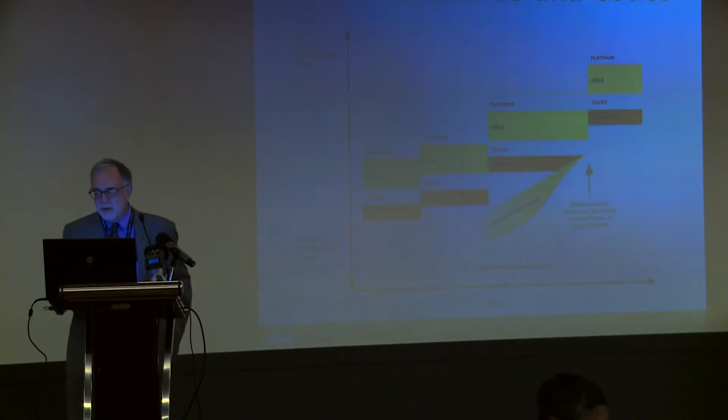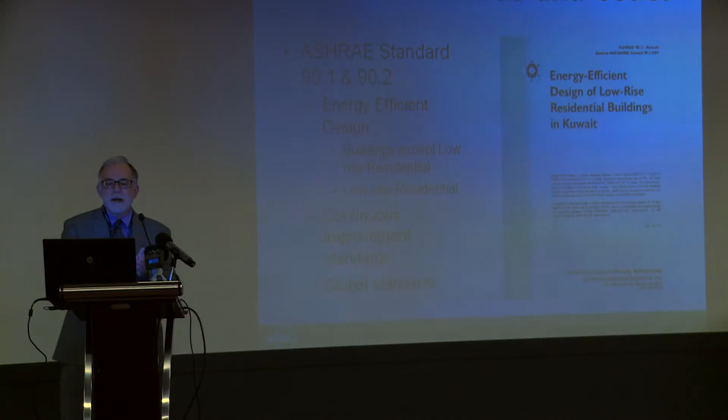ASHRAE is doing the exact same thing. I'm sure most people in this room are familiar with our standards on building efficiency and indoor air quality. This is 90.1, energy efficiency design of commercial buildings.

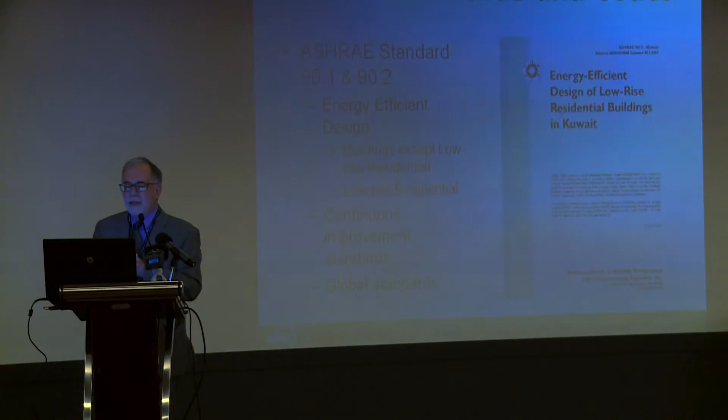90.2, and I'm very, very proud of this. We have a 90.2 for Kuwait that we did here recently. And these are our energy efficiency standards that we use for both commercial and residential construction. They are continuous improvement standards.

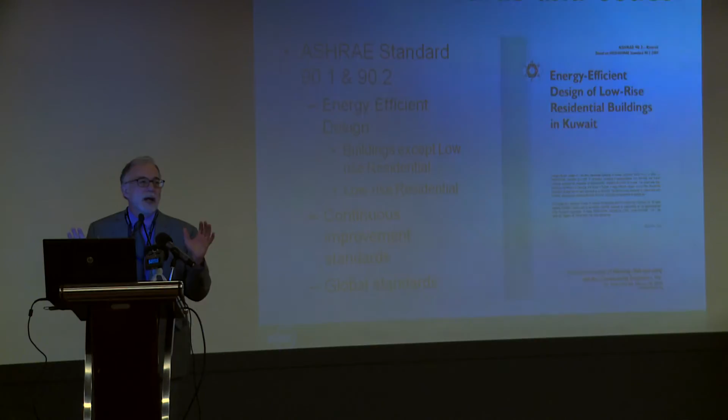That is, say 90.1 comes out every third year. We are getting ready to republish that document at the end of this year. Hopefully it'll be out around October or November. And in there you will find that we are pushing that envelope out. We are raising that bar just like LEED is doing.

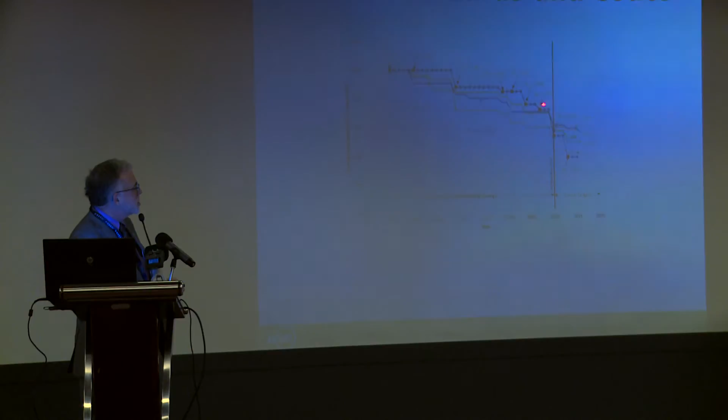So you can find this graph on the ASHRAE website, and this is really the evolution of the 90.1 document. Over time, you can see how we started out here in 97 and how we have a continuous dropping of the energy use in a building based on 90.1.

And I can tell you right now, the 2016 version, as I mentioned, is imminent. It's going to be out at the end of this year. It is going to be the same thing. We're going to continue to drive those values lower and lower to help our industry get to a net zero impact. And so these are a couple of the main pushes that we see within the industry.

Exactly the same story. Energy use on this planet is going to increase. Carbon on this planet will increase. And it is going to increase most dramatically in the non-developed economies, because that's where the population growth is going to be. So it doesn't make any difference whether you look at his data from a carbon standpoint or my data from an energy standpoint. We're telling the same story.

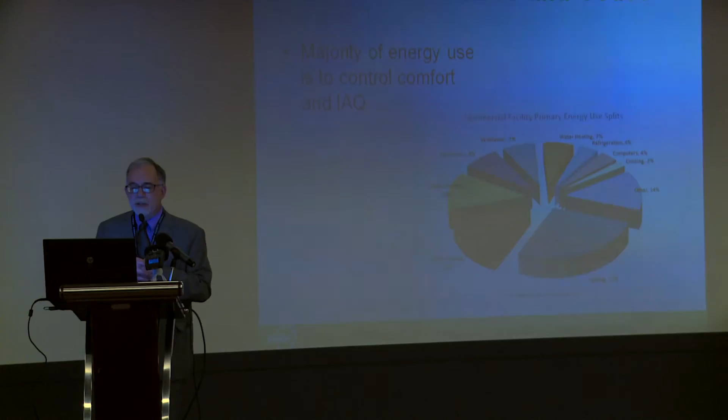I chose this graph because this is from where I live. I was born and raised in Nebraska in the United States, a very rural agricultural state. And as you can see, it's a somewhat cold state because we have quite a bit of heating there. The same data, if you went to Europe, you see that there's a little shift. This is actually from southern Europe. So you see a shift, more space cooling, much less space heating.

And then finally, if you were to look at the data from Kuwait, you would find approximately 65% of the energy use in buildings in Kuwait is used for air conditioning. Okay, so most of the energy use in a building is driven towards comfort and IAQ. So when you start talking about a smart building, when you start talking about HVAC strategies, the first thing we have to keep in mind is those topics are all tied together. And so we're going to have to figure out how to address them together.

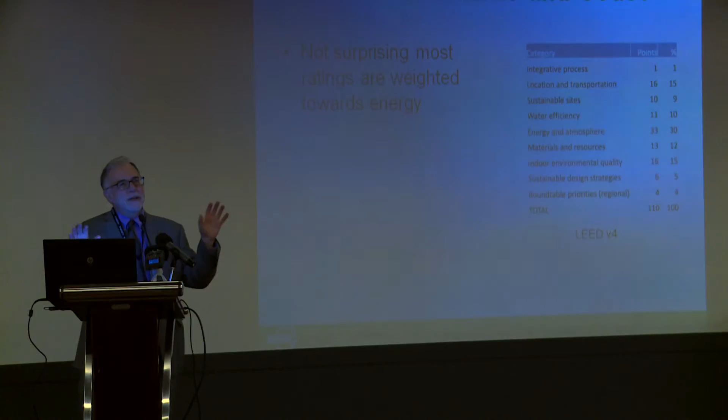How do we get all of those to flow together to create an integrated type of approach? So it's not terribly surprising then as we look at some of the standards and codes that I've mentioned. They are weighted towards energy use. Certainly LEED version 4 is a good example of that. And that kind of drives the equation and causes us then sometimes to forget what a smart building is really going to do in terms of indoor air quality and human comfort.

I also mentioned that I think all of us are going to see a consolidation of codes in our future, which I think is good news. It's going to make it easier for the designers in the room to design. I'm a contractor. Okay, so I came out of the contracting industry. It's going to be a lot easier for us to build buildings.

Here's a great example that is going on with ASHRAE. ASHRAE has signed a contract with the International Green Construction Code, and we are going to consolidate our standard 189.1 on design of high performance green buildings into the International Green Construction Code. So there'll be one document. Instead of one referencing the other, it'll be integrated and it'll be whole. That, we think, will be available to you in 2018.

That's our goal. But I think that is exactly the kind of thing that you're going to be seeing more and more of in the future. And as I said before, I think that's going to be a really good thing for us. So here's some of the issues that we've got going on with standards and codes. Number one, we're running out of physics.

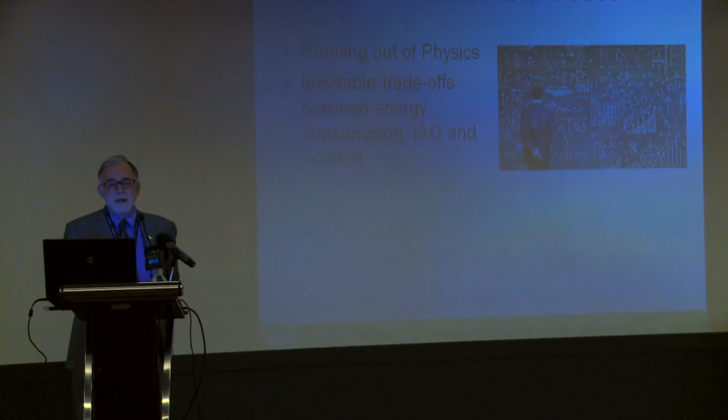Okay? We're trying to move this planet to a more sustainable position, and we're trying to do so with building efficiency. But ladies and gentlemen, there's only so much insulation you can put in the roof, and then it doesn't return. There is only so much insulation you can put in the walls. There is only so much improvement you can do in glazing before you run out of physics. So we're going to have to do something else if we're really going to get to this point of net zero buildings. There's an inevitable trade-off between energy efficiency, energy consumption, IAQ, and thermal comfort.

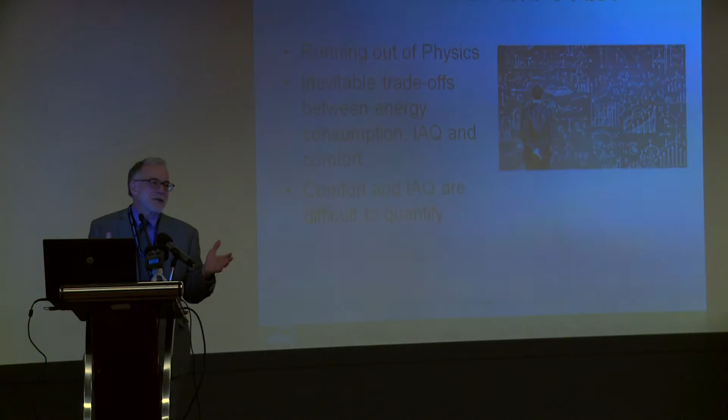Talked about that. Comfort and IAQ are difficult to quantify, much more difficult than energy efficiency. And that's one of the reasons that, quite frankly, the codes and standards are weighted towards energy efficiency because, from a physics standpoint, it's easier to measure and it's easier to deal with. We're seeing some changes in comfort and indoor air quality research, and I'm going to talk about that a little bit later, but it is still much more difficult for us to deal with.

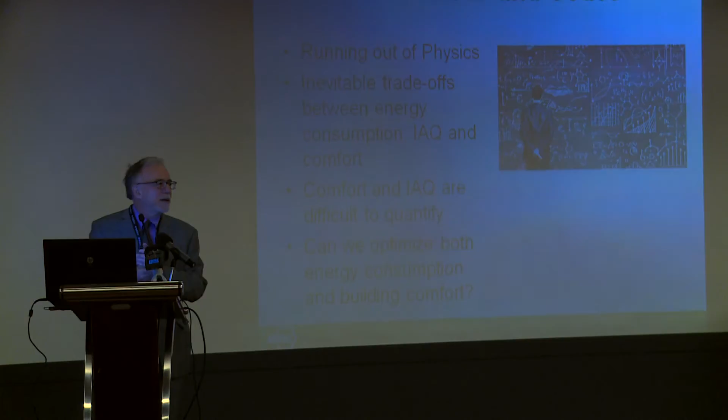And then finally, here's the question, and here's the topic of this talk. Can we optimize energy efficiency and building comfort and indoor air quality all at the same time? Is that possible? If it is possible, how's that going to be done? If it is going to be done, what's that mean to you? How can you use that information then to make your firms better, you more productive, teach your classes at a higher level, whatever it is that you do in this industry, how can we use this information to make us all better?

Now I'm gonna make another prediction. Okay, I told you this is kind of a futuristic look at our industry and some of the things going on. Here's the thing that I think, 3 things that are going to transform your lives. Number 1, there's going to be a dramatic change in technology coming up shortly. And ladies and gentlemen, I think it's going to be breathtaking. The changes that we're going to see in both computer hardware, computer software, what that hardware and software can do and what it means to us.

That will drive this industry to a more integrated design basis. Okay, we talk about integrated design now, but we don't really do integrated design well. And this new technology, I think, is going to allow us to finally grasp that opportunity and do something with it. And here's what it is we're going to be doing. It's building performance. I think in a very short period of time, our industry will change, and instead of relying on a prescriptive basis of designing and constructing buildings, we're going to move towards a basis where buildings are designed and constructed on a performance basis.

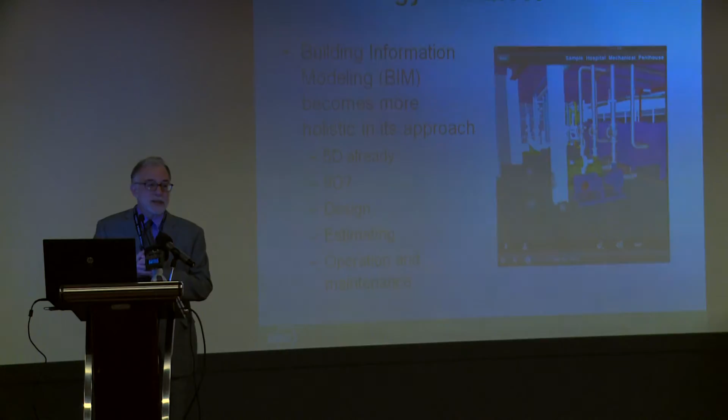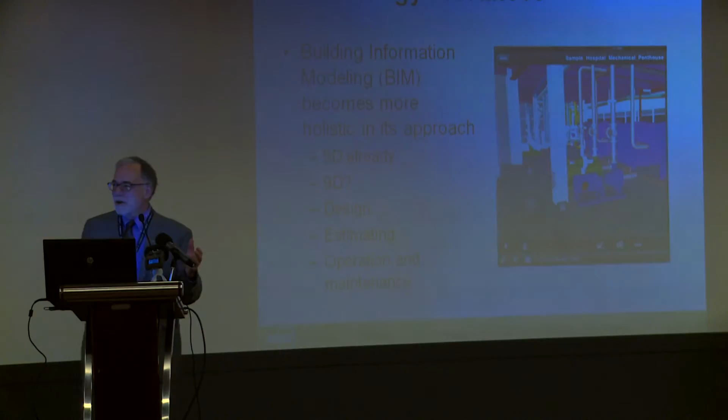We're already using it on what we call 5D, okay? Regular 3D plus scheduling plus costing. They're talking about modifying building information modeling up to 9D. So it is doing its own design. It is doing its own estimating. It is taking this data and creating everything from purchase orders to manpower loading charts to every concept of the cradle to grave aspect of a building, including maintenance and operation.

And to me, maintenance and operation has been the weak link that we've had in our industry. We have many design engineers in the room. We know how to design a high-performance building. And I know we have contractors in the room. We know how to build a high-performance building. But it doesn't make any difference how you design or build a building if the owner of that building doesn't make a commitment to operate and maintain the building to high-performance standards. And that's been a part of our problem.

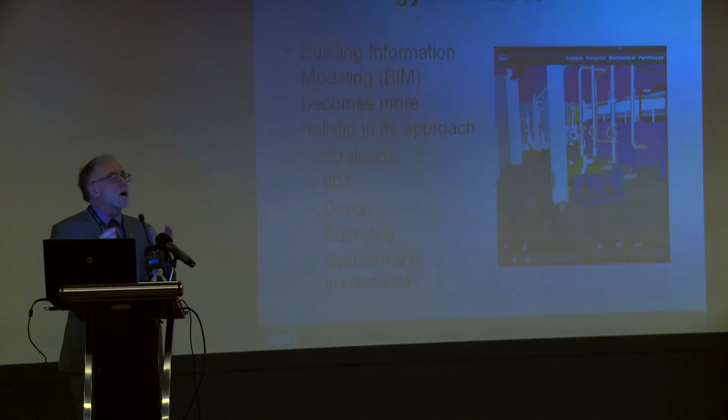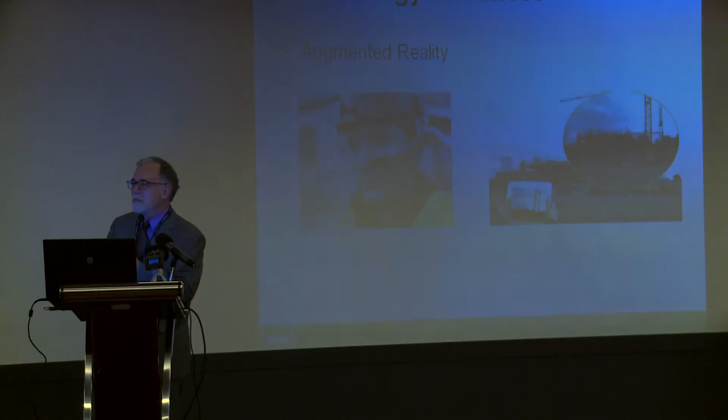This new software, this new technology, and it's probably still a couple, 3 years downstream yet, but once it gets here, it is going to be remarkable what it's going to be able to do. One of the things that it's going to be able to do is it will have embedded into it augmented reality. It's not going to be just a 3D program that will model a building. It will model a building and it will play what if you want to make this change. It will create a model that you can project.

And they have got now safety glasses that you can put on, and the BIM model will be projected through your safety glasses, and as the picture on the screen demonstrates, it will put out there whatever it is you have designed right on the job site, so you can see it in real time. They have created a backhoe with a windscreen on it, and the windscreen is BIM embedded. So now the operator of the backhoe can call up the BIM model and project the building design as it is out onto the site, and they can start doing their earth moving work based upon the latest design.

This augmented reality process is amazing. I've seen some of the prototypes or the beta versions. I saw one here just recently. It was all done through an iPad. And so this gentleman said, okay, take this piece of paper, 8.5 by 11 piece of paper, and he said, watch this, and he hit a button on his iPad, and out of that 8.5 by 11 sheet of paper emerged this steel structure of, it's like a 3-story building. Came right out of the page with nothing but an iPad.

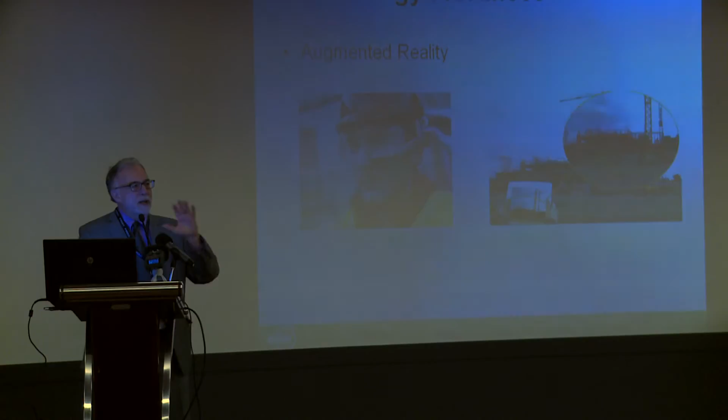And then it suddenly dawned on me, I'm moving this paper around, and the paper knows which way is north, and the model knows how many windows I have in the building, and it has recalculated the solar load every time I have moved that paper. And apparently the HVAC equipment was on the roof, and so when I moved that paper to increase the solar load, it increased the structural steel just like that. And I'm sitting there with my mouth open, and I'm going, wow, is that cool? And that's the kind of thing that we're seeing come down the pike. And it's going to change other industries as well.

Just to show you I am really a college professor, it is pop quiz time. Who knows what that is?

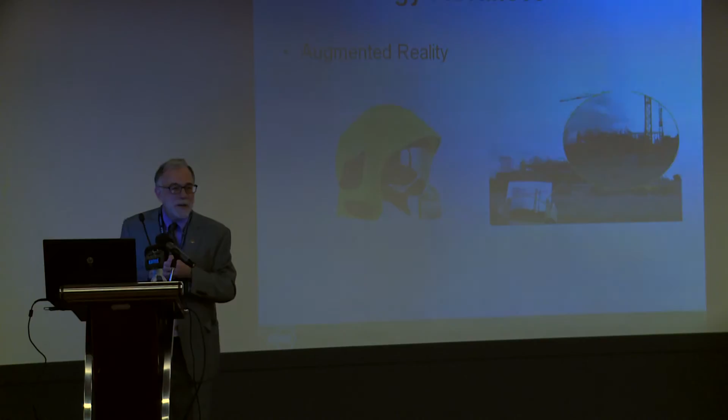I'm talking about the object here on the left. Anybody want to guess what that is? It is a helmet. Whose helmet is it? What's that? It's a fireman's helmet. That is a fireman's helmet, and the shield is embedded with BIM.

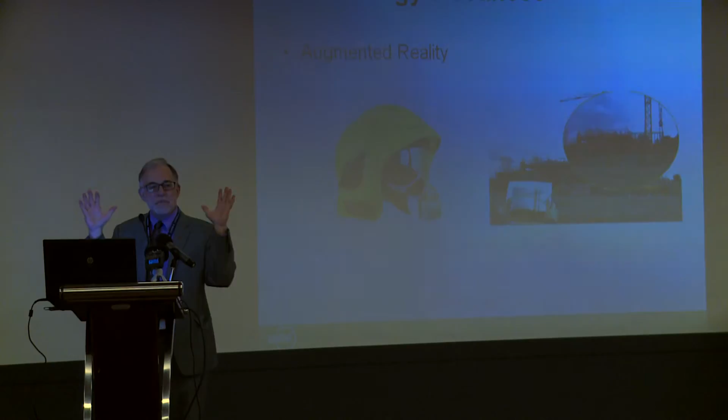And now, here's the important thing. What kills more firefighters, smoke or fire? Smoke is correct. More firefighters die because of smoke than fire. And so what they've done is they've taken a fireman's helmet, put a shield on it, embedded BIM, and as long as that building has a BIM model, that firefighter can go into that building, it can be filled with smoke, and yet they can see exactly what's in front of them, thus getting to the people in the building quicker, saving more lives, and at the same time saving their lives.

So this is kind of new stuff coming on that's going to be really transformative. Let me show you another one that I thought was really amazing. And this gets us to the point of big data, or the Internet of Things. Those are two things that you hear a lot about. And those are obviously emerging trends that are going to have a big impact on us too. Big data refers to the fact that now in a building we can generate data points by the hundreds of millions. Okay, which is great, but what do you do with that?

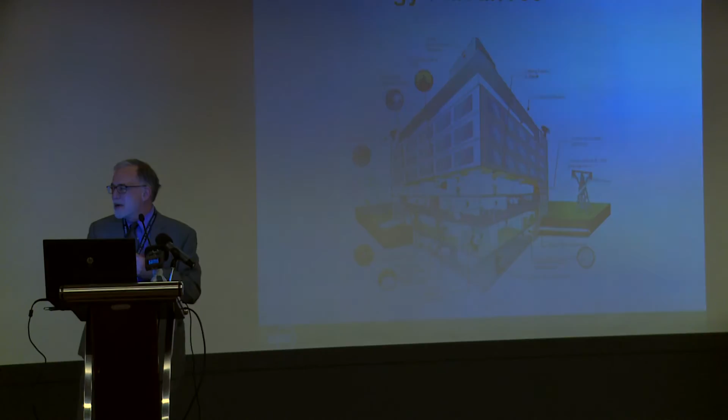We are now at 2015, and we are at almost 4 connections per person. By the time we get to 2020, which is just 4 years off, they're expecting 6, or 50 billion connections for our population. I'm talking worldwide. Now that's an explosion of connection. And it will then help us get to a smart building with the same kind of technologies I've been talking about with BIM. This is going to get us to a smart building where all the various components of a building can talk to each other.

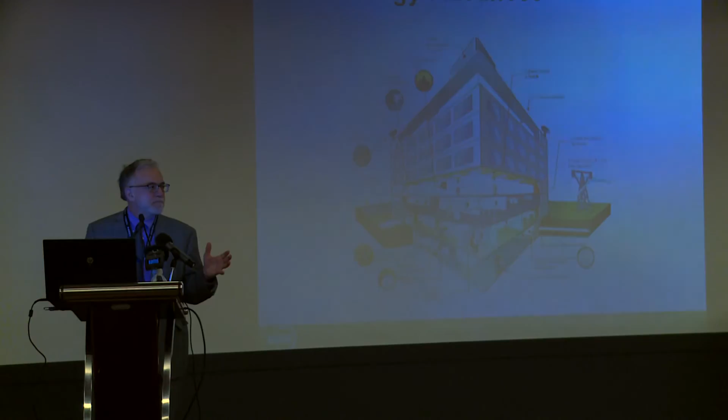And so for the first time, we're going to be able to do things like balance our electrical grids. We are going to balance the energy both from a site standpoint and from a source standpoint. That is going to be transformative for this planet. And what's so exciting to me is all of us in this room are a part of that new tomorrow, that new process that, gosh, I'm excited. I mean, the technology that I'm seeing come down the pike is pretty much amazing on many different levels. I thought of one more that I'm just going to tell you.

I was reading some research the other day. There's a gentleman in California that has figured out a way to 3D print a home, a 2-story home, in 22 hours. 3D print technology. There's a project going on right now in Amsterdam: 3D print a 24-foot steel cantilevered bridge. 2 months. I mean, this is an amazing set of technology that's coming down towards us.

And think, we have such a housing problem worldwide. What if we could 3D print homes in 22 hours? How would that change this planet? Think about that for a second. Awesome. So this new technology, and by the way, I just talked about a few things that are going on on our planet. Now we can take that technology and we can drive it to create truly integrated design.

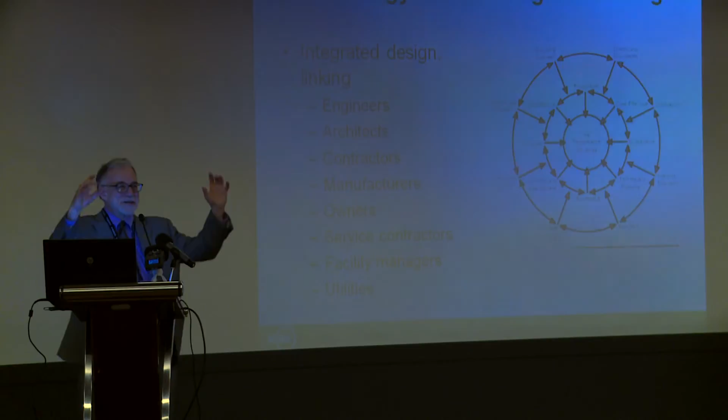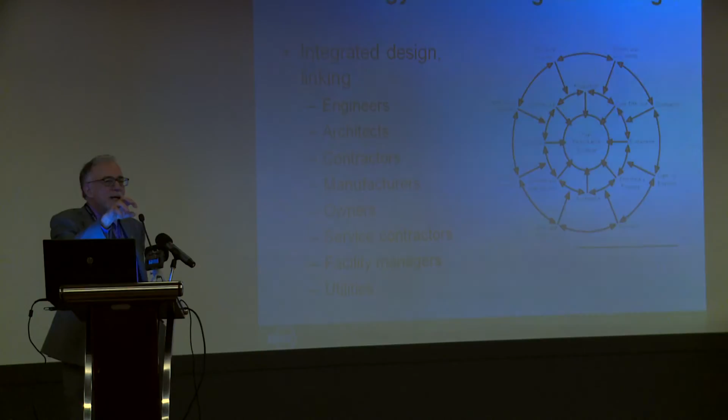You got these little boxes, and you have to stay in your box, and you got these little arrows, and in truly integrated design, all the boxes go away. All the boxes go away. And now all you have is all these arrows going every which way because all of us, it doesn't make any difference what discipline you are representing today, all of us have a duty and a responsibility to get that building to high performance. That's why we need integrated design if we're really going to take the steps that are necessary.

Now, what is ASHRAE doing about it? ASHRAE absolutely believes that technology is going to drive us to integrated design, and integrated design is going to drive us towards building performance. So you pick up some of our newer products, like the Advanced Energy Design Guides, which we're extremely proud of, 189.1, which we're extremely proud of. You notice that our sections in there now allow for integrated design paths instead of the prescriptive paths. You're going to see more of that as we transform our standards and our guidelines and our codes to an integrated approach. You're also going to see our standards move towards building performance.

Now, many of you also work in Europe. Europe is much more performance-oriented than the United States, and yet we recognize that that's our future. And so as you pick up 90.1 at the end of this year, you're going to see a much more fully developed building performance approach on it. And this building performance is going to focus on how do we really do this HVAC thing and do building comfort and indoor air quality simultaneously? How do you optimize all that?

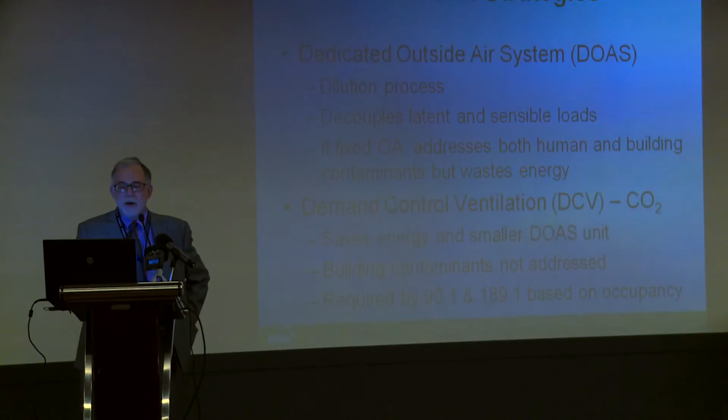This is still, after 200-some years, the best strategy that we can use, and certainly the most economical. A couple other strategies that we use quite a bit: dedicated outside air systems and demand control ventilation. I think we're familiar with those, but those are technologies that we've been using now for a few years, and they work. They each have their own limitations, obviously, but they are solutions that we are currently using.

So how can we use this stuff that I've just shown you, the current stuff, how do we adapt that to go to that next level? How do we make this better? Okay? Part of it is going back to this concept of big data and the Internet of Things and technology. Very shortly, we're going to have the ability to do sensing and controlling at a level not seen before, to create both better comfort, healthier buildings, and at the same time drive down energy consumption.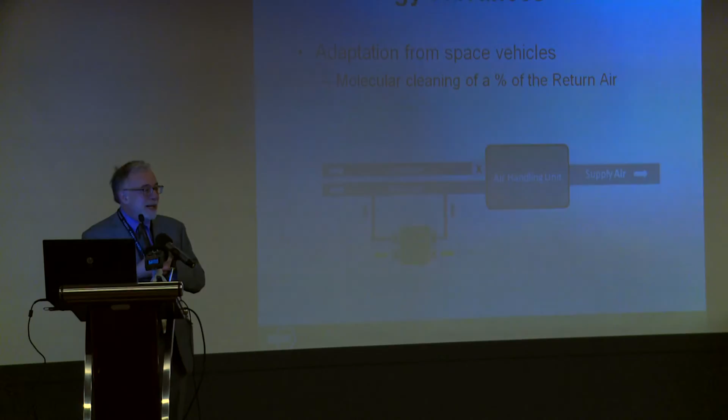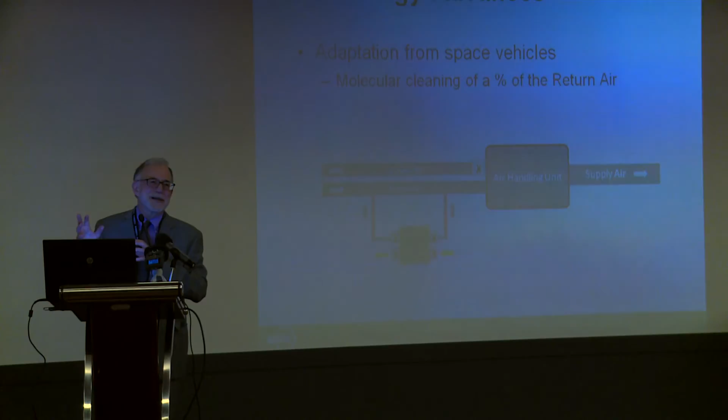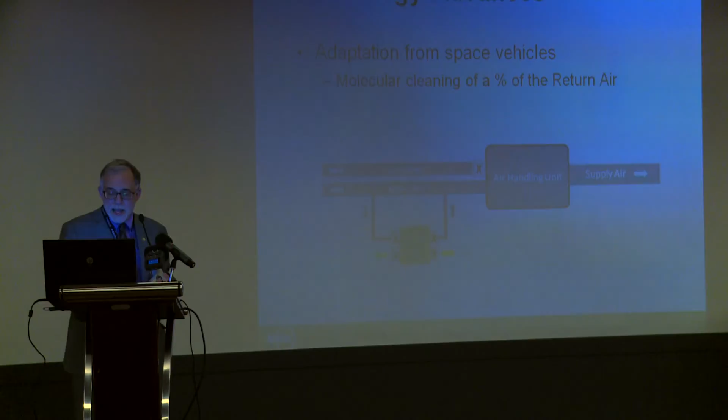Here's one more. This is an adaptation that came by recently from a molecular cleaning product. It's a sorbent that we use in the space industry. Now, it was long thought that this particular process was too expensive ever to be used in a building. Well, there's been a change in technology here, and this change in technology comes to us from physicists, and so they have now figured out a way of regenerating these sorbents on a much more economic level,

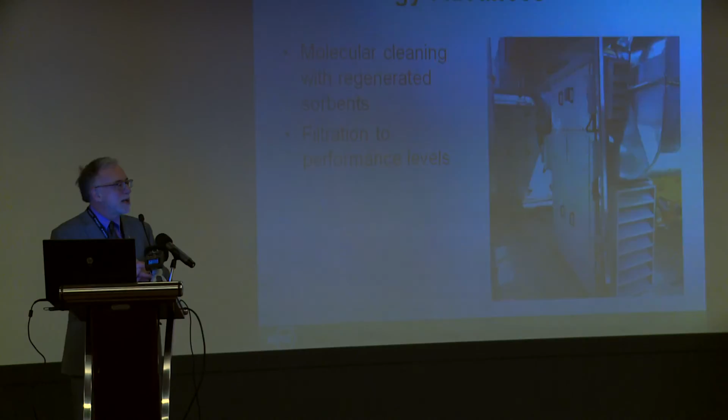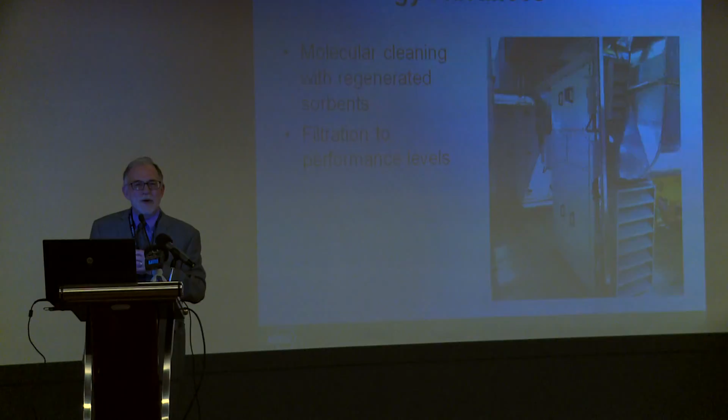and so all of a sudden you can now ultra clean out this air, and they use it as a side stream kind of filter, so you're not cleaning the whole airstream, you're only cleaning 10 or 15% of it, and it allows you to come up with a much cleaner airstream inside the building with a much reduced level of outside air. So now you are really starting to optimize both sides of that equation. This is something new, so keep that in the back of your mind.

Here's some more new research that is about 3 or 4 weeks old, so this is brand new. This is some research done in South America, a really fascinating set of research done by a biologist, of all things, and he was doing some research on bacteria levels in homes. And he wanted to look at 2 different types of homes. The homes we live in, right, which are sealed and conditioned. And then he wanted to look at what he called traditional homes that were not sealed and not conditioned.